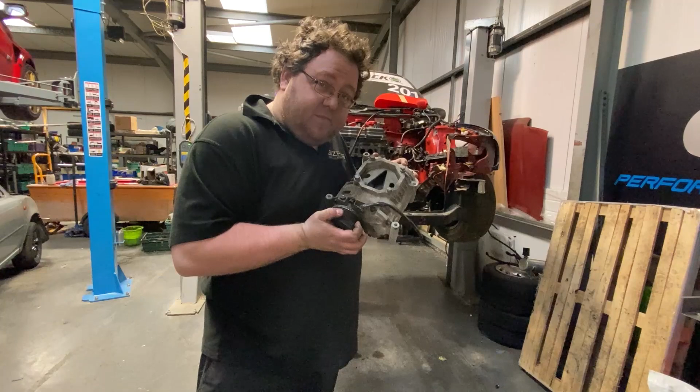So on today's video on the Micra, we're going to look at mounting the supercharger. So in the video we did the other week, we talked about our plans for the Micra, and that was to supercharge and turbocharge it. And in today's video, we're going to look at getting it mounted into the Micra.

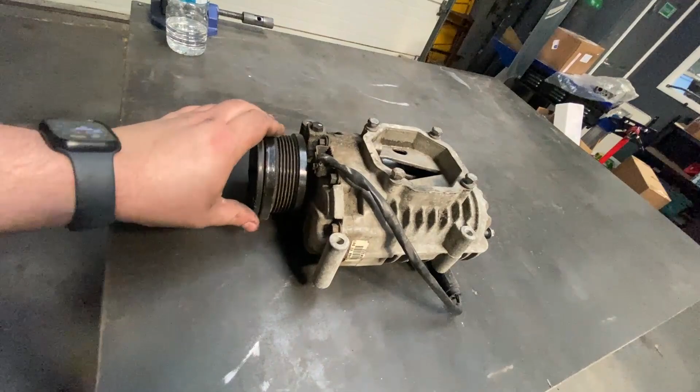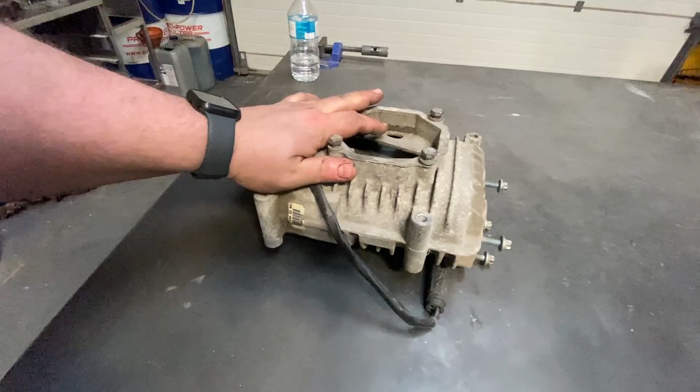So this is the model of supercharger that we're going to be using. It's an Eaton M62. This is the Mercedes SLK specific one. You can tell it's the Mercedes one because it's got a short snout and it's got a clutch pulley on it. We chose this one because after a lot of reading and some Googling, this was the shortest one we could find. We could have used an AMR like we did last year, but obviously we're looking to push a bit more power this year, so we're looking for a bigger unit to do so.

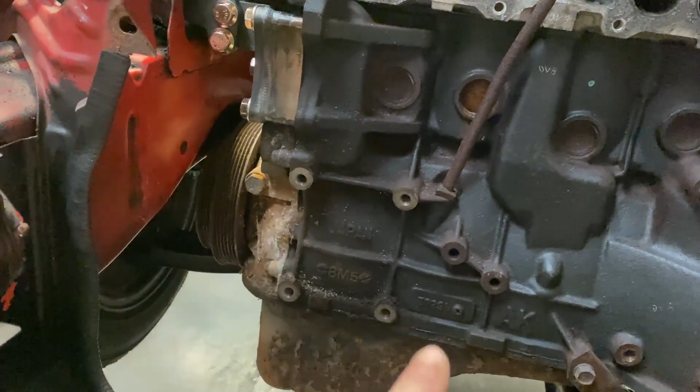So the first thing we need to do is get this mounted, and the first step in doing so is we're going to pick up these 4 holes. We'll get a ruler out, we'll measure the bolt centres and everything, and change that into a CAD drawing. And then once we've got that done, we'll then pick up these bolt holes on the supercharger. This one's going to be a bit more difficult because all 4 bolt holes are in different positions. It's not exactly a square, so I've got a bit of a cheat way to do that, and I'll show you how we will do that.

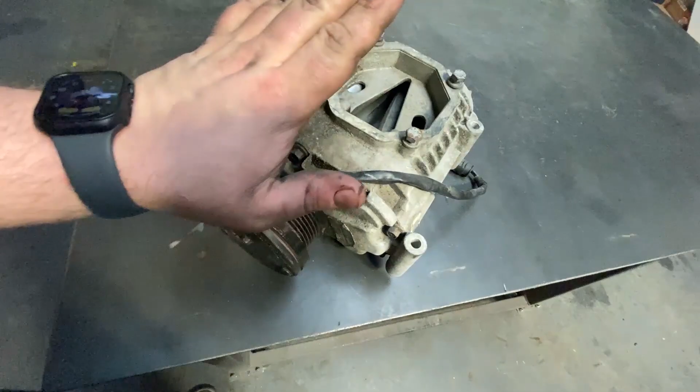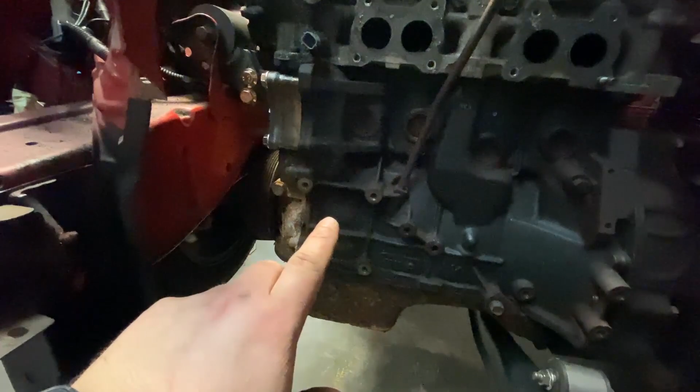So once you've got these hole centres of the engine and the hole centres of that into a drawing, we'll then work out where the holes for the supercharger have got to go on this plate, and then we're more likely to get it laser cut because it's cheap, cheerful, out of mild steel.

And then as well as the supercharger, there's not really enough room on the back of the engine to mount the alternator without notching the chassis rail to get the belt clearance through. So we're more than likely going to do the same on the 1.3 with this engine, and that's we're going to mount the alternator down here underneath the supercharger. So yeah, first things first, let's get this measured and turn it into a CAD drawing.

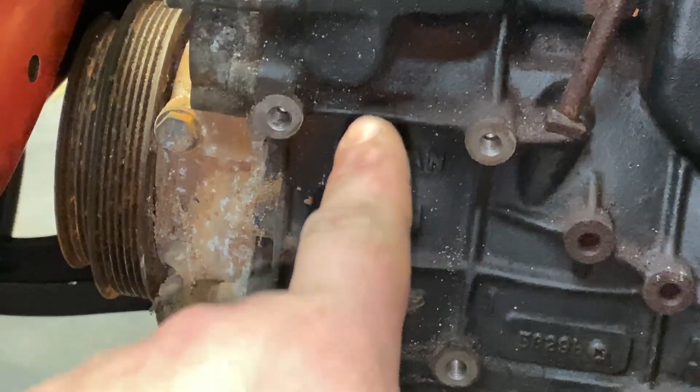So that wasn't as bad as I thought it was going to be. So long story short, it works out roughly 90mm for the bolt hole centres side to side and 110 from top to bottom. I have measured it off camera and the holes are dead square, so we've not got to worry about any offsets. But yeah, we're definitely within tolerance there. I always like to account for like a mil anyway, so even though they're an M10 thread, we'll probably have the holes drawn to 11mm just so we've got a bit of wiggle room on that. So that's the easy part done.

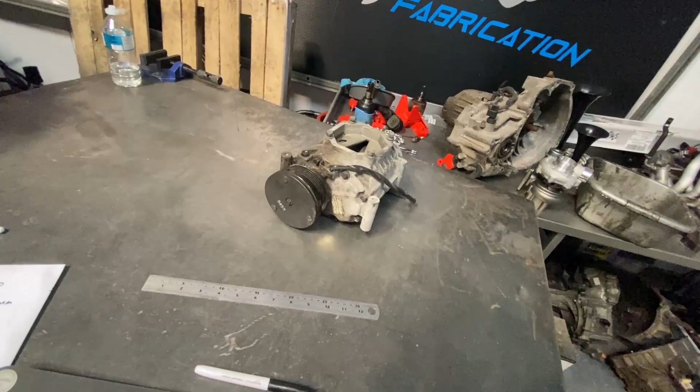Now let's turn our attention to the supercharger. And I'll show you a trick way to easily get the bolt centres of something where this isn't square. So what I mean by not square is that these 2 bolt holes aren't in line with each other, and that one isn't in line with that one. So you can probably just about tell from there. But yeah, there's a dead simple way to figure this out. So for tricky bolt centres like this, if you're a proper engineer, you could probably figure it out by measuring it. But if you're lazy and you want to do it the quick and easy way, you just use one of these, a flatbed scanner.

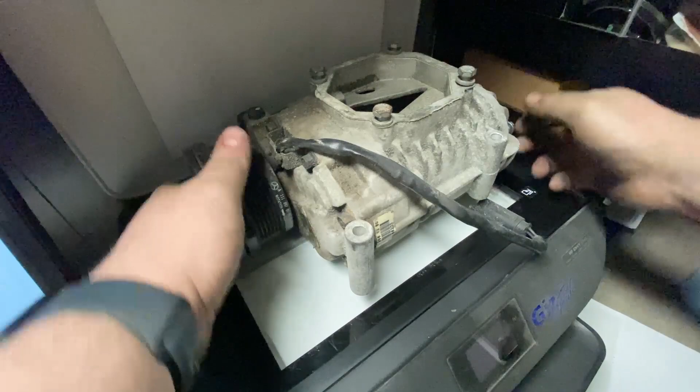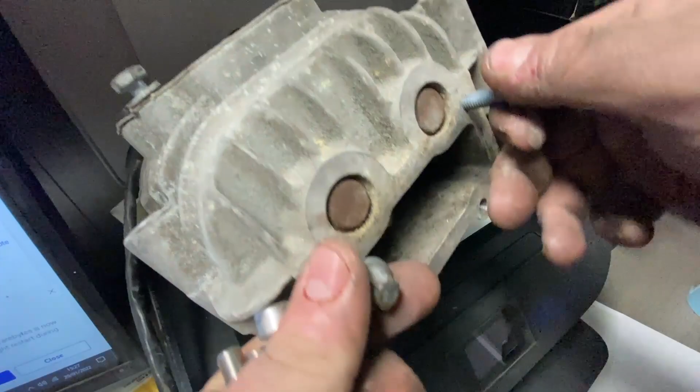So the supercharger's now on the scanner. The important thing is to make sure you have a flat datum. And in our case, we've used the backside of the supercharger, this piece here, because it's nice and flat and parallel. So place it on the scanner, just push that to one side so it aligns itself so it's all straight, and then get yourself some long bolts, pop one in each of the bolt holes, and then scan it.

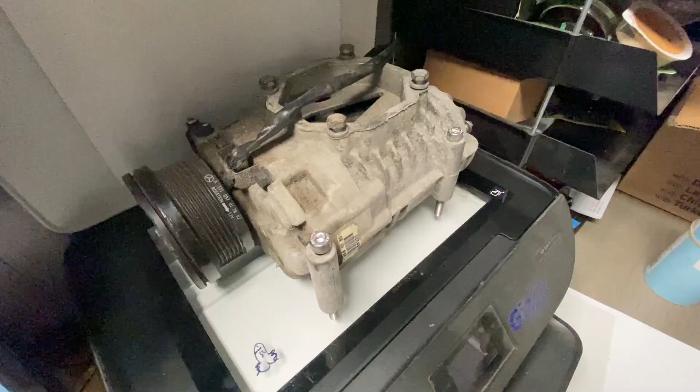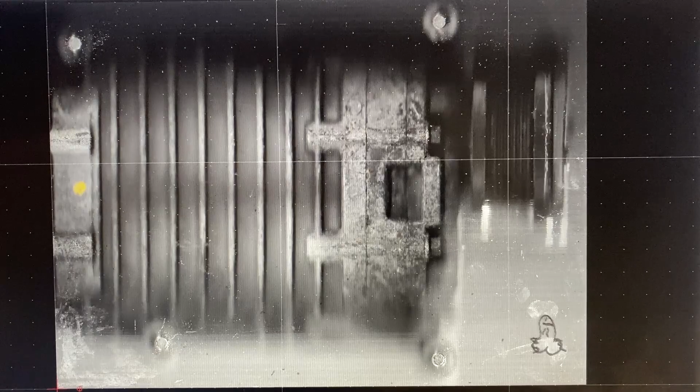So now we have scanned the supercharger, we have the image loaded up into our chosen CAD program, which in our case is QCAD because it's nice and basic. The overall image of the supercharger is blurry, but the important part is that we've picked up the bolt hole centres by using the long bolts. So the reason why we use long bolts is they touch the glass, which means when they scan, it makes them a lot clearer than the rest of the drawing.

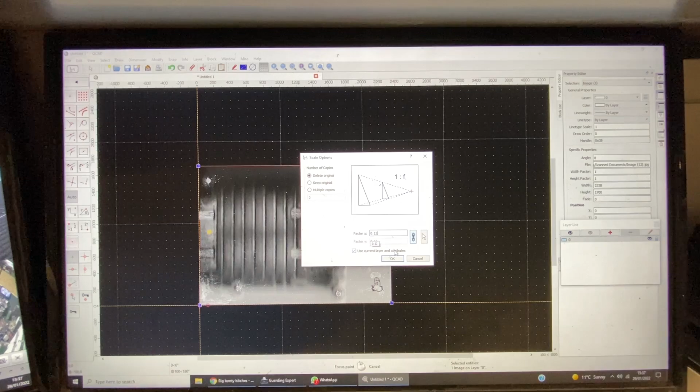So the important thing now is to make sure the drawing is scaled, so that when you produce your CAD drawing of the bolt centres, it's the actual dimensions. Every scan is different. In my case, I know that it's 0.127, and that now means that this drawing here is to scale.

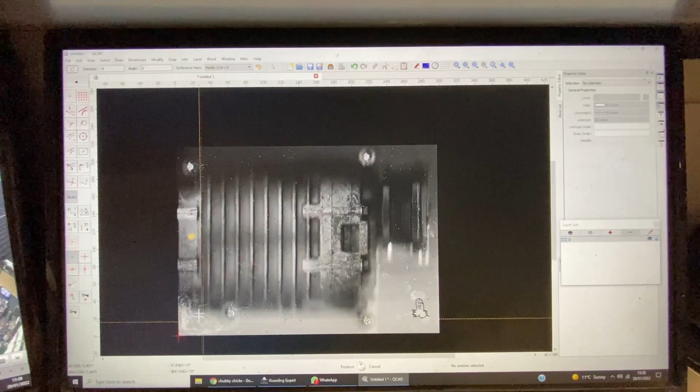So the next thing is that we know that these holes here accept an 8mm bolt. So we'll just go in and draw a 9mm hole, roughly centre of each bolt. We're doing this freehand, like so.

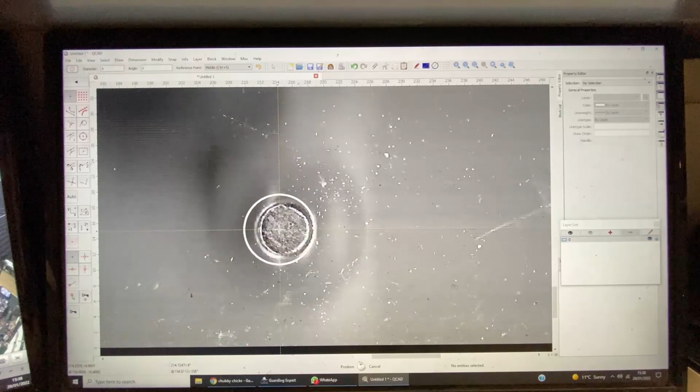Don't forget to circle your nuts.

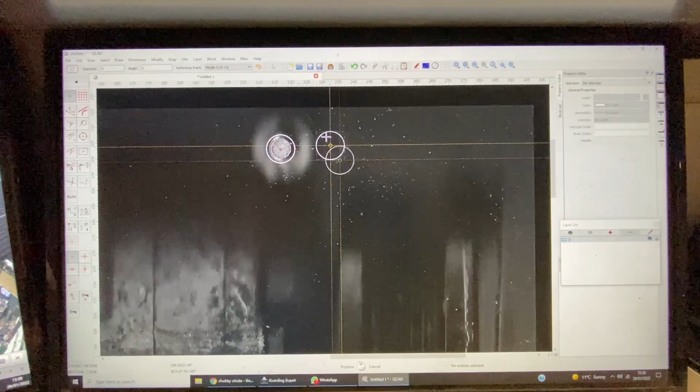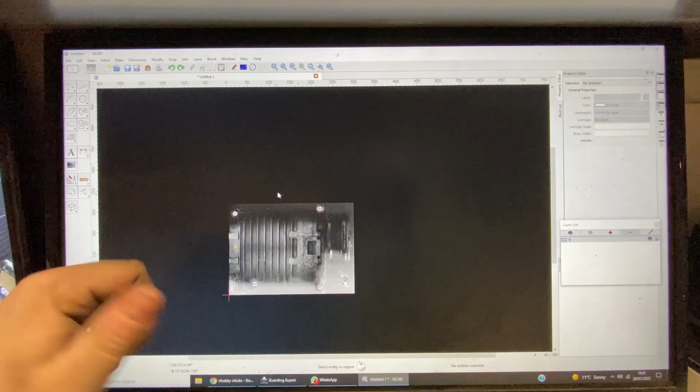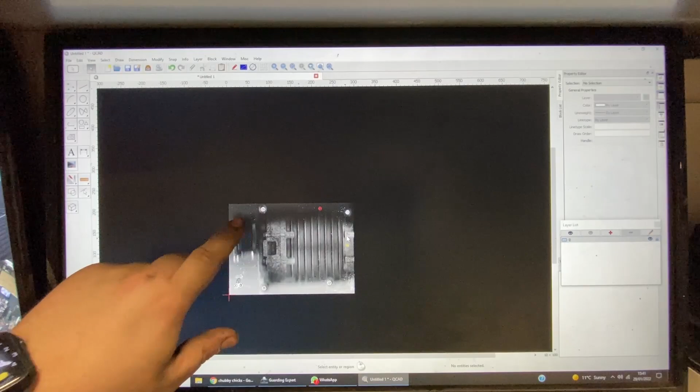So now we have the hole positions for the M62 Supercharger. So now we've got our hole centres, we need to make sure that the Supercharger is in the correct orientation. We're going to work with this drawing as if we're looking at the engine, as we were in the video clip a second ago. So passenger side of the car, driver's side of the car. So we need to mirror the drawing, and obviously then we know the pulley is going to be at the top, not the bottom. So yeah, that's the orientation that the Supercharger needs to be in.

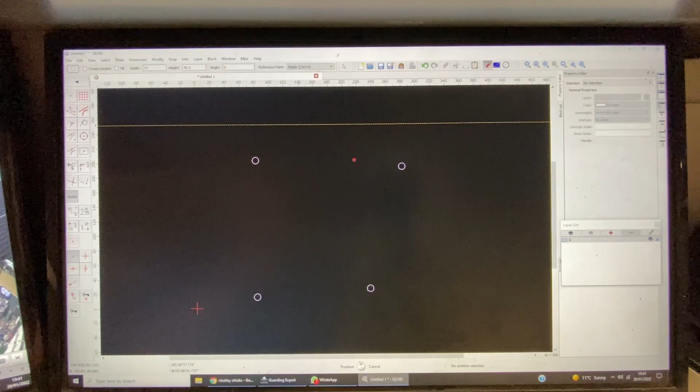So now we've got these dimensions, we can get rid of the drawing and my nuts, and that gives us something to work off. So now we've got these bits in, we need to draw our hole centres for the engine, which we know is 90mm wide by 110 deep. We're just going to place a random square. This is my way I like to work. We know there are 10mm holes, so we're going to draw an 11mm hole to give us a bit of wiggle room.

Once we've got that done, we can get rid of that. So now we have our hole centres for the engine and our hole centres for the Supercharger. So the challenge now is to figure out where these bolts have got to sit. So we've got our Supercharger in the right place for the pulley alignment.

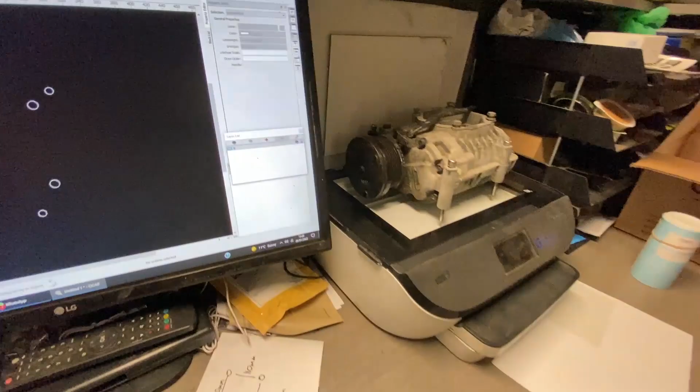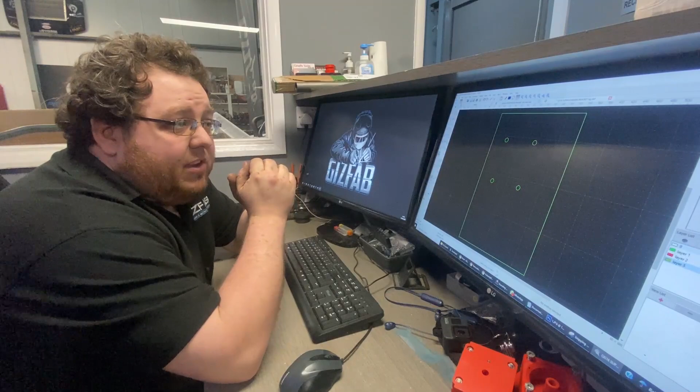So now we've got the drawing, we've got a plate here which we're going to use to complete the mock-up process for the Supercharger. So what we'll do now is we'll email this drawing over to our good friends at ICB. We'll get them to laser cut it for us out of some thin material like 3mm mild steel, because it's pretty cheap. And then once that's cut, we'll bring it back and then we'll continue the mock-up process.

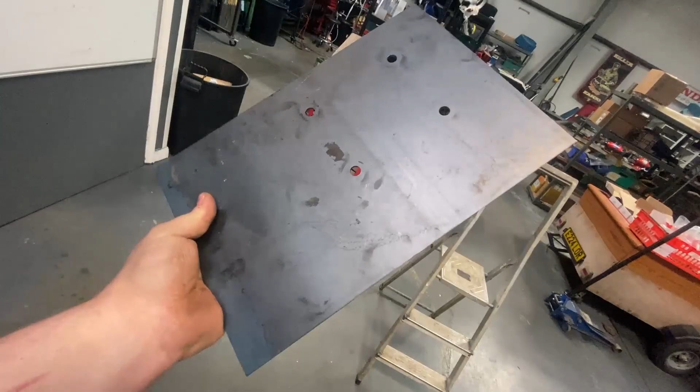And there we go, one laser cut mounting plate, well, mock-up mounting plate for the Supercharger. So next thing is we need to get this bolted to the engine, and it's going to be easier to take the engine out, put it on an engine stand, so we can rotate the engine to 90 degrees so that we're not struggling to hold the Supercharger up. So yeah, we'll just quickly take the engine out. It's only 4 bolts, so it'll take 5 minutes to put on an engine stand, and then we'll continue with the mock-up process.

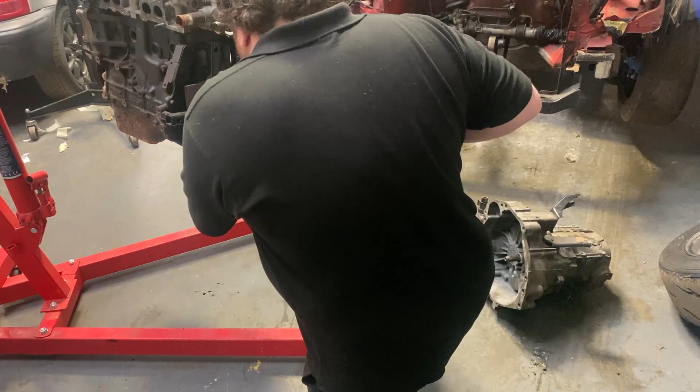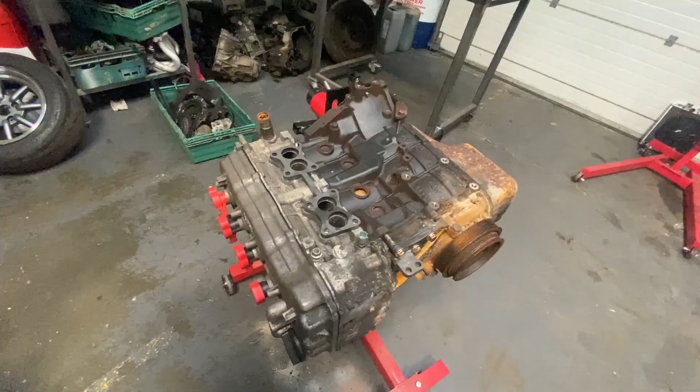And there we go, we've got the engine out. So next port of call is we'll quickly bolt the plate to the engine, and then we'll see where we can sit the supercharger.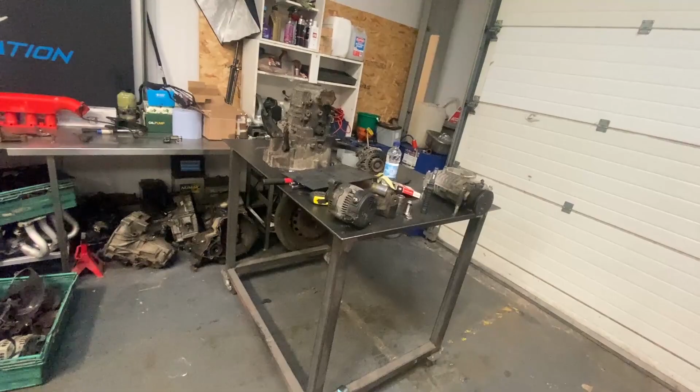So the first issue that we've got is this part of the plate here is sitting on this engine mount, so it's not sat flat with the engine. So what we're going to have to do is use some thick M10 washers to space the plate up so we can clear this. Yeah, so we're spot on there. Let's get it bolted down. And there we go, one plate bolted to the engine. It looks a bit ridiculous, but by the end of the video you'll understand why we've done it this way.

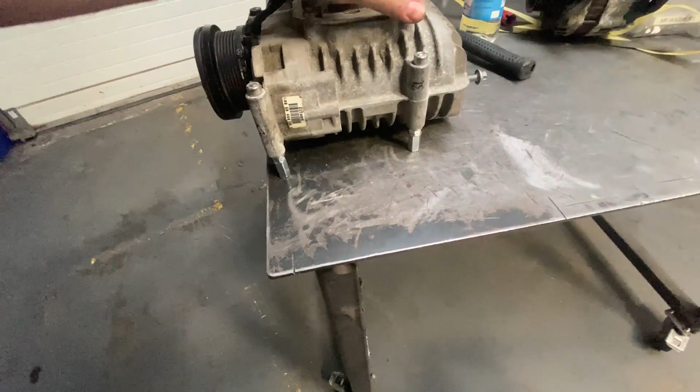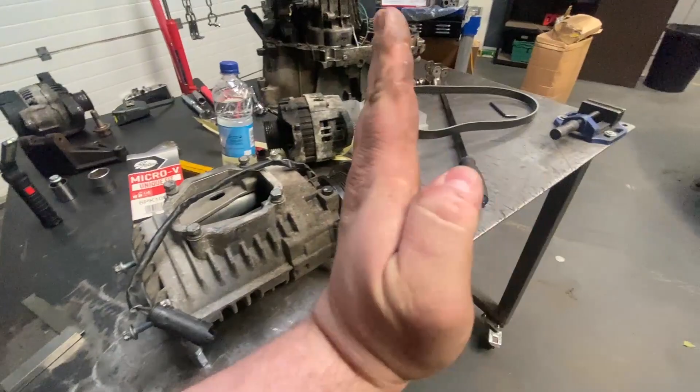So this is the supercharger we're using, M62, as I've probably told you a million times before. I've already spent some time to level the supercharger so it's flat with the table. So with an engineer's square, we've got the pulley perfectly 90 degrees to the table. And then on this side, we've got the flange 90 degrees to the table, so we know that when we put that on the plate, the pulleys won't be offset. So yeah, let's go quickly put the supercharger on that bracket.

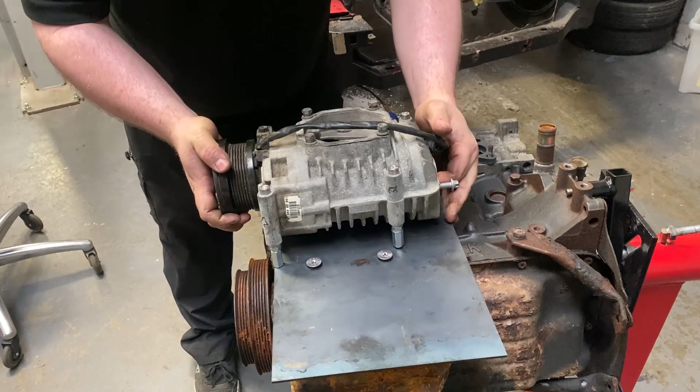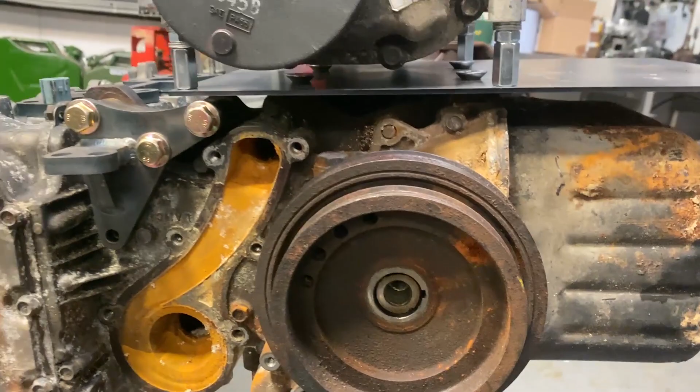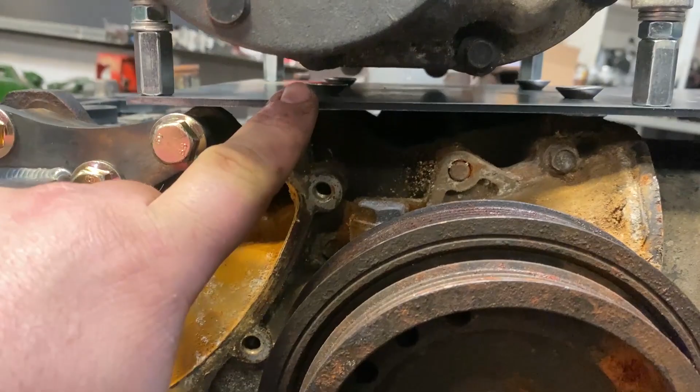So I hope you're following, and I hope this all makes sense. So now we've got the supercharger stood on these little connecting nuts. We can't really lower the supercharger down anymore because obviously we need to make sure we've got clearance for a pretty decent sized bolt head on there. So now we've got it on the plate. We can't really mount it any higher than that because don't forget we've got a turbo manifold to go here as well that we've got to make sure we've got enough room for.

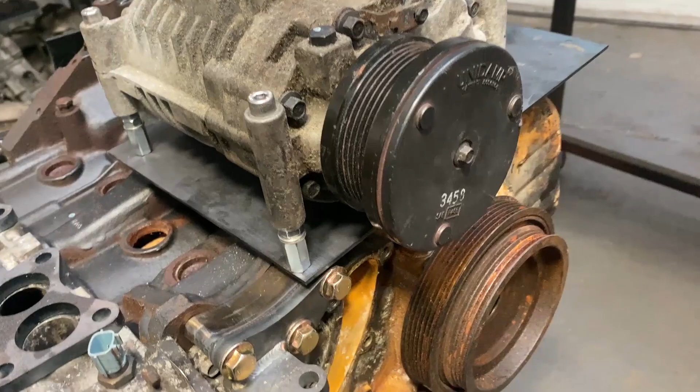So next thing we need to do is just line these pulleys up, so the belt tram and tracking is the same. And then from there, once we've got the measurements for the supercharger, we'll then go back to the computer and readjust the drawing, and then we'll look into the alternator.

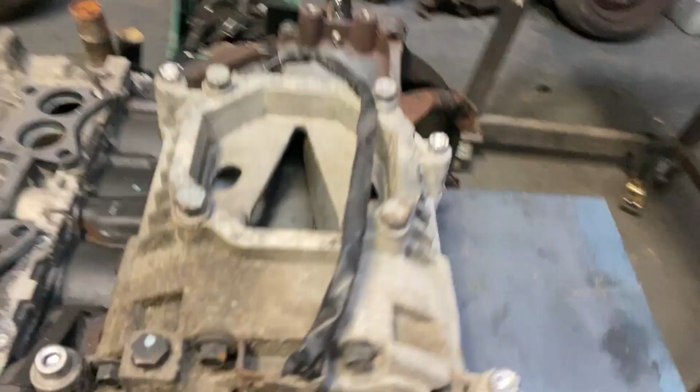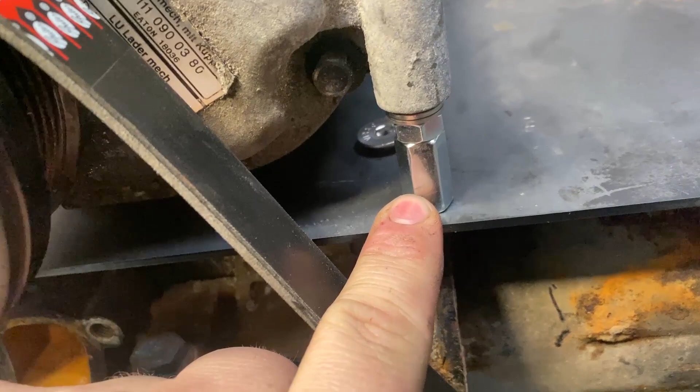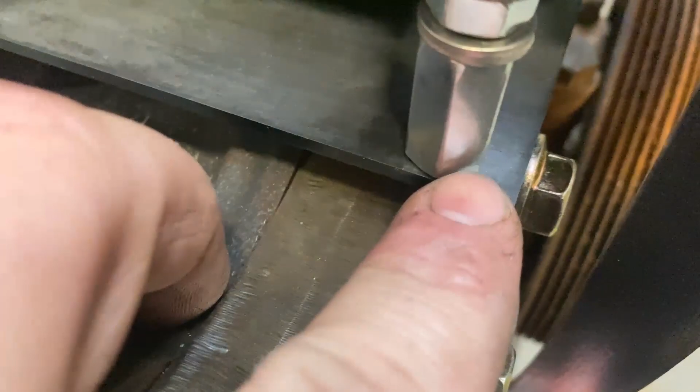Right, so I've spent a few minutes making sure we've got the belt alignment right, and I'm happy where it is. So these are 13mm connecting nuts, or M8 connecting nuts, but they use a 13mm spanner. So the distance from the edge of the plate here, where my thumbnail is, to the flat of this is 5mm, both sides. And then the pointy section of it, whatever term you want to use, so this piece here where my thumbnail is, wants to be in line with the edge of this plate.

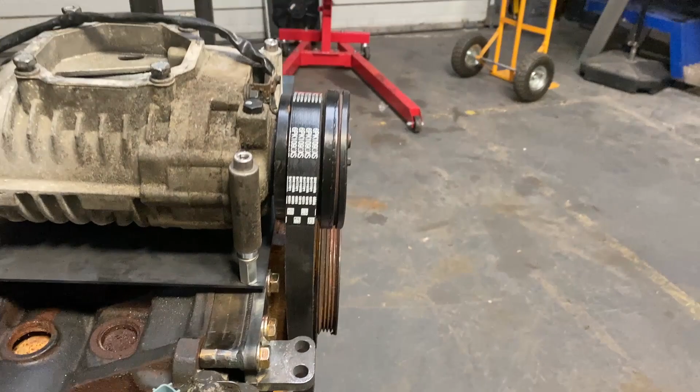And that puts, I mean you probably can't see on camera, but that puts the belt alignment between these two pulleys perfect, about dead on. So now we know what measurements we need, we'll go back into the CAD software. Obviously we've already drawn our 4 holes for the supercharger. We'll move them in relation to where this nut is, and from there we can start finalising the drawing for the supercharger bracket. So here we are back on the QCAD.

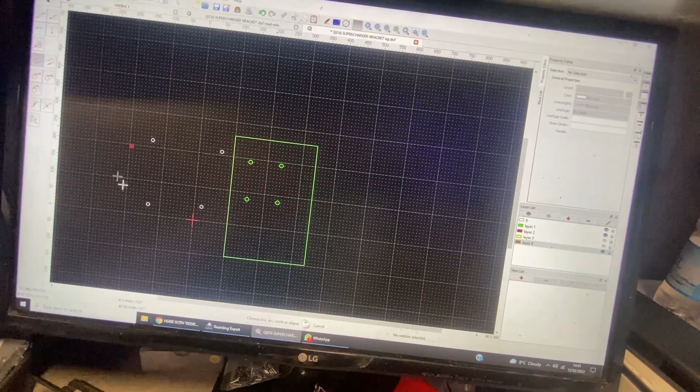If you remember, this is our original drawing of the plate we've had laser cut. So with the information we know now where the supercharger's got to fit, we can now move these 4 holes onto this plate so they have a relationship with these 4 bolt holes here. So we know we need a 5mm offset off this edge, so just going to use this tool here to give us a quick offset there. And then we need to make a 13mm wide hex, like so. So that represents the connecting nut that we were using.

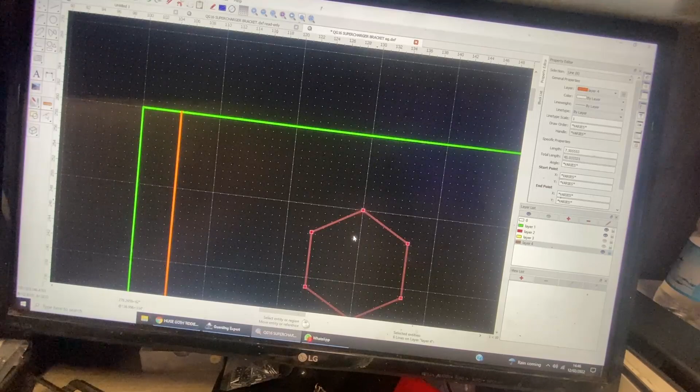I'm probably using this software backwards to a lot of people, but it is what it is. So now what we need to do is bring this up here like so, and then, because again I don't know how to use this software properly, I'm going to draw a line between this edge here and that edge there, and I'll go ahead and get rid of that piece there. I can now select the 13mm hexagon, or a nut in this case, and then we can move this spline here to there. So now this connecting nut matches the same location that we've got on the plate on the engine. So now we're going to draw a 9mm hole in the center.

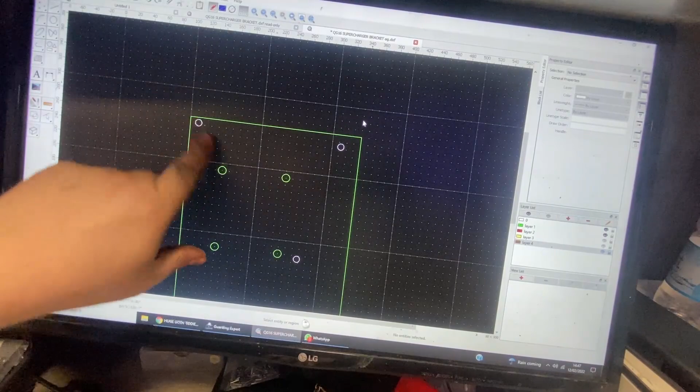In the middle there. And then, because all these holes here are also 9mm, we can pick it up with this spline here, and then we can drop it on that spline there. So then let's get rid of the orange, and there we go. So now we've got these 4 bolt holes here which bolt the engine, and the 4 white holes which are our supercharger. So what we can do now is we'll just start this drawing up. Here's one I did earlier. So this is what the simplified version of the plate looks like to mount the supercharger.

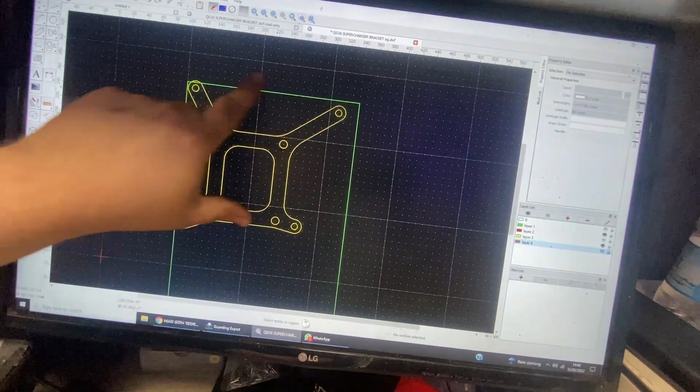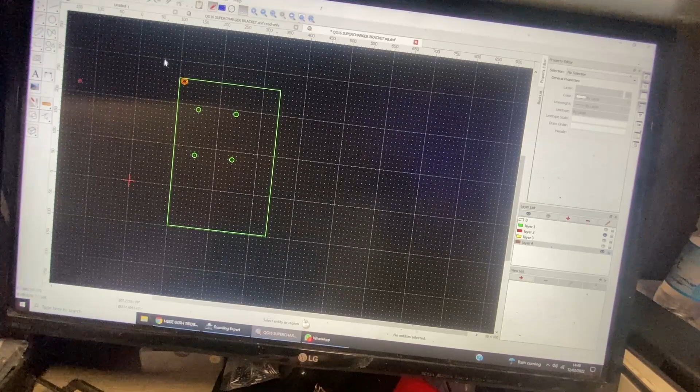So now we've got this far, what we'll do is we'll go take this plate off the engine, and then we'll weld these nuts to this plate just quickly with a couple of tacks. So that means we're not going to move the supercharger during the next phase, which is to mount the alternator. So yeah, let's go get this off the engine and let's go get some weldy.

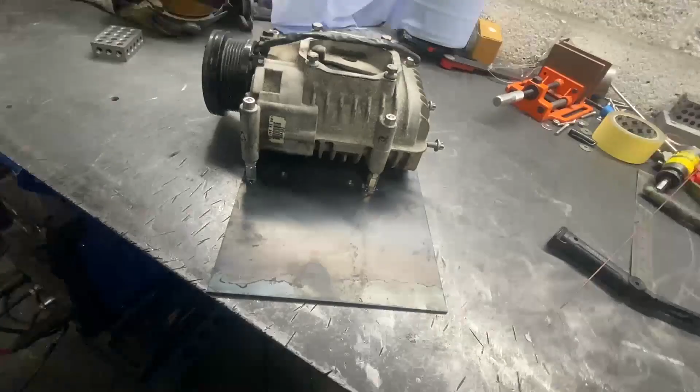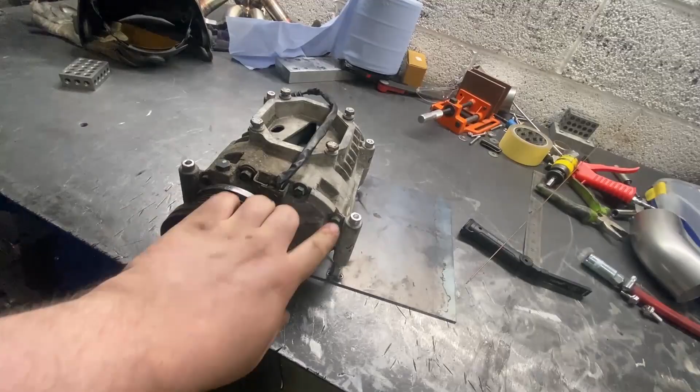We have it. We have now got those nuts tacked to that plate. So when we do the next step with the alternator, we're not going to move the supercharger. So that's going to stay where it is. So what we'll do now is we'll quickly unbolt the supercharger from this plate. We'll go get this plate back on the engine and put the supercharger back on the engine, and then we'll go on to the next step with the alternator.

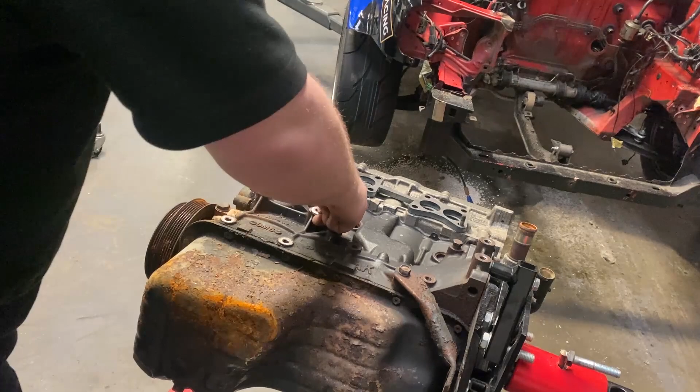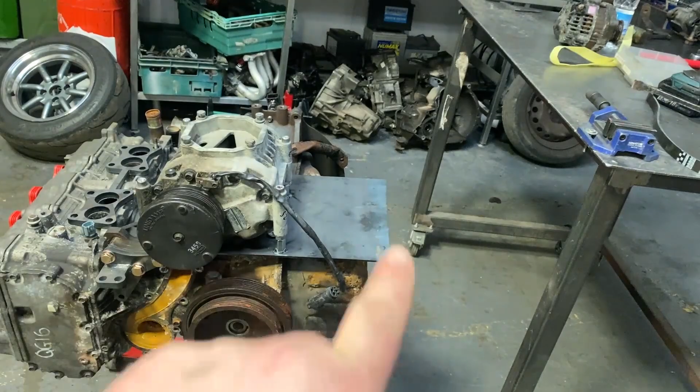And there we have it, one supercharger mounted to the lovely engine. Now our next task is to mount an alternator using the rest of this plate here, the area we've got here. Now I'm kind of already under the understanding that the alternator is more than likely going to be lower than the sump. But with this splitter, I know I've got at least an inch below the sump for the splitter. So as long as I don't go further off that plate, I should be fine. Otherwise I'll probably have to reconsider the aero or something, I don't know. Yeah, I'll just go dig an alternator out and we'll have a play.

So we've got the alternator on there with the factory bracket that was off the old QG engine, but I'm hoping to reuse it for this. But straight away I can see there's going to be a clearance issue. So I've already measured, so from the flat of this engine mount here upwards, we've only got 8 inches to play with. And if you see where these 4 bolts are here on top of the supercharger, that is already about 7¼ inches. So we've not got much headroom there.

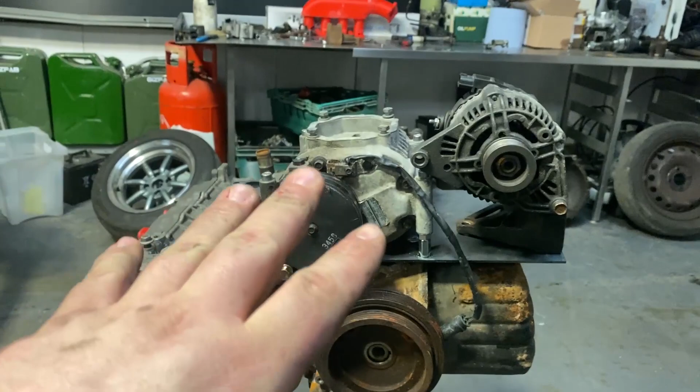Otherwise we'll more likely have to backdoor the intercooler to socket onto that. But unfortunately the alternator is just a no-go. So I think straight away I'm going to sack off the idea of using this bracket, and I'll have to come up with some other solution to mount the alternator. Yeah, let me go scratch my head for a moment.

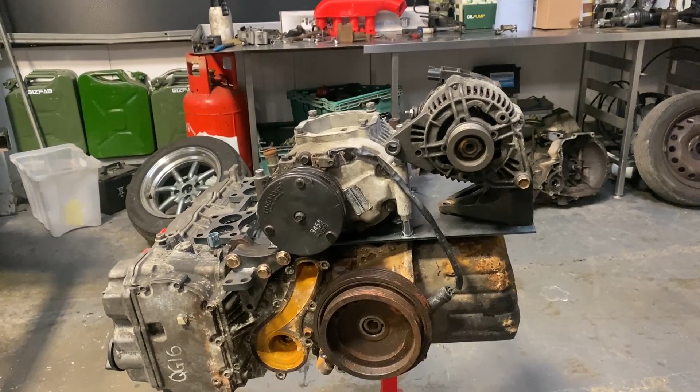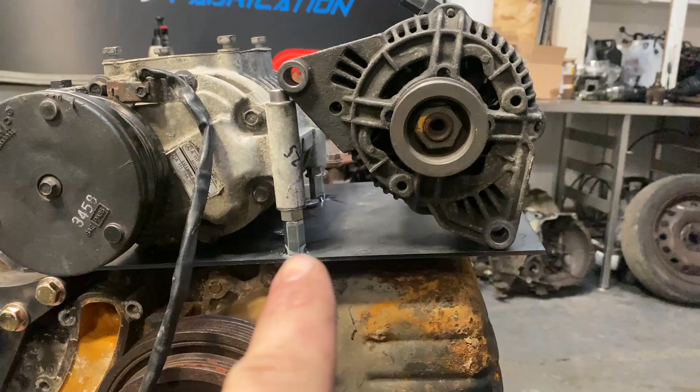So I've been scratching my head for 10 minutes. We took the bracket off, and you can probably see we've still got quite a height difference here, but under this part here, so in between the engine and the sump, we've got quite a bit of space there. We've got at least an inch. So what I'm thinking is, with this plate here, we're gonna have to maybe step it down, or make a couple of wing brackets to pick up a mounting point for the alternator. But I think if this bolt hole here was further down here, that would solve our clearance issues.

And on top of that, this is one of the main mounting holes off the Micra's tensioning system for the alternator, because obviously the alternator is a tensioner. You can see we've not got much clearance there, so we're probably going to have to angle that up slightly so we can get that on. And I'm thinking we're more than likely going to have to bring some sort of substantial part of the bracket in this area, so we can solidly mount the alternator, and then we can use this area here to cut some sort of tensioning system. But as it is, that alternator is pretty much lined up with the other two pulleys, so I'm happy that the belt's going to track nice.

I just now need to come up with a solution to mount this alternator temporarily. In my head, I've already got an idea for the drawing, but obviously ICB is shut at this time of day on Saturday, so there's no chance of getting another bracket laser cut. So my only option is to get the grinder out, get the cutting wheel out, and then we'll come up with some sort of bracket to mount the alternator. So yeah, next task.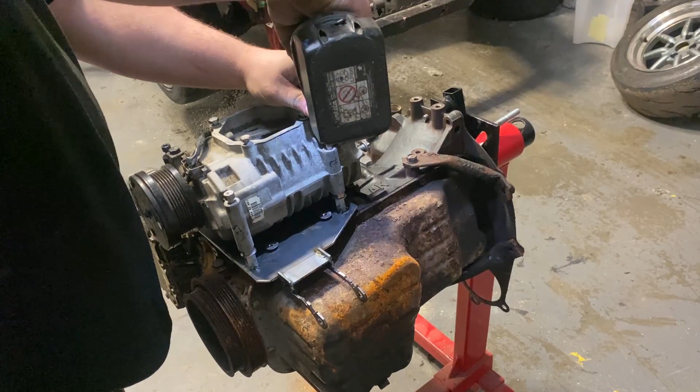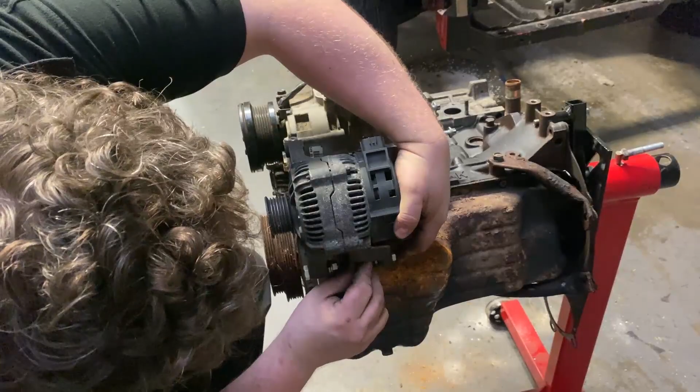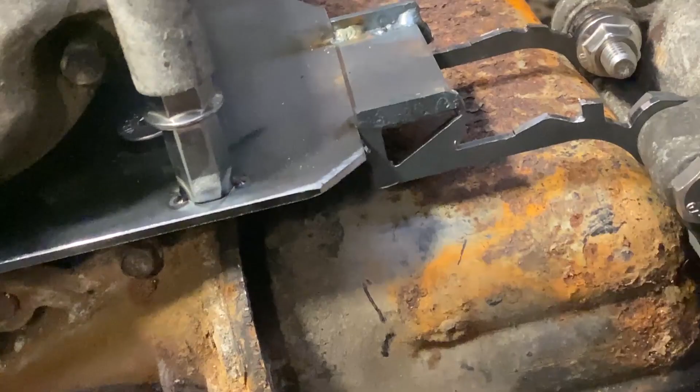And there we have it. We have the supercharger back on, we've got the alternator back on. It took a couple of attempts there, as you've probably seen in the footage, but I've got to where we are now. I had some laser cut profiles that we used for a couple of strut braces. They are very flimsy at the moment, but it's doing its job in retaining the reference point, so we can then get these drawn back up in the CAD software.

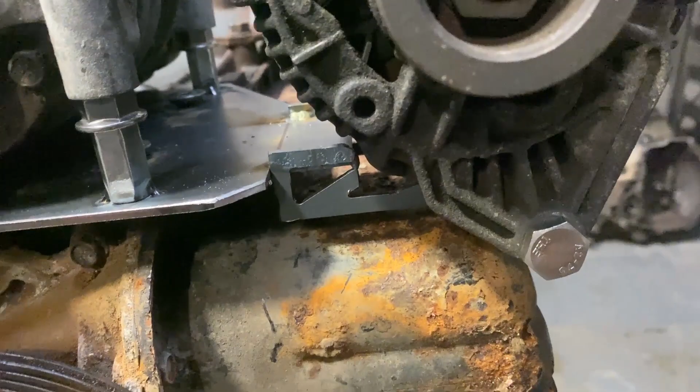Clearance wise, obviously we are touching here at the moment, but that's because the weight of the alternator on these flimsy brackets isn't helping. They're going to be done out of 6mm mild steel, the entire bracket, so the finished product will be a lot stronger than what we've got here. And then there's a couple of clearance issues with the casting here and here, but we're going to redraw these brackets a bit differently, so we won't have that problem on the final one.

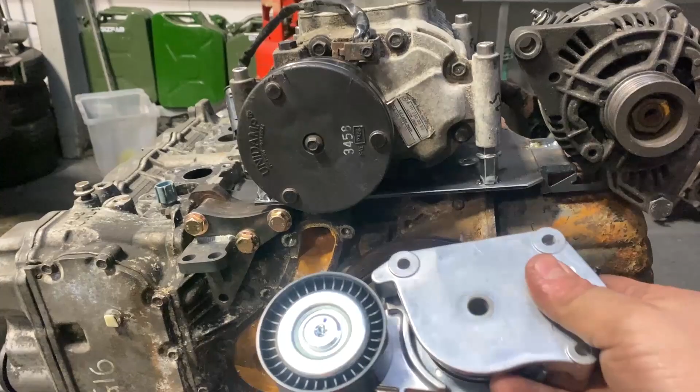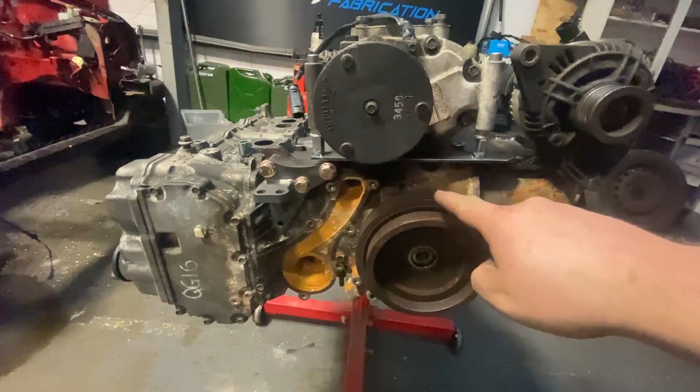Yeah, so the next thing is we need to come up with some form of tensioner system. Now, I really like the idea of using a sprung-loaded automatic tensioner. This is off a BMW Mini. Unfortunately, it's no good because I believe this is for a 5PK belt, and we're using a 6 rib belt, so I need to sit down at some point this evening and try and find a more suitable bracket. But we'll be looking to mount it in this sort of orientation, so that way we get a decent wraparound of the belt around the supercharger pulley and the alternator pulley. I always like to try and go for at least 50% engagement on the belt to pulley. That makes sure we limit the amount of slip that we could potentially have.

And that's it for today's video. I'm going to split the footage up for the supercharger bracket just because I've run out of time today. It's going to take me a couple of days next week to get a new bracket cut, so there's nothing really I can do today, so I might as well get this video edited and uploaded for you to watch. So yeah, stay tuned. We've got some other bits and bobs to do to tell you about the direction that we're going.